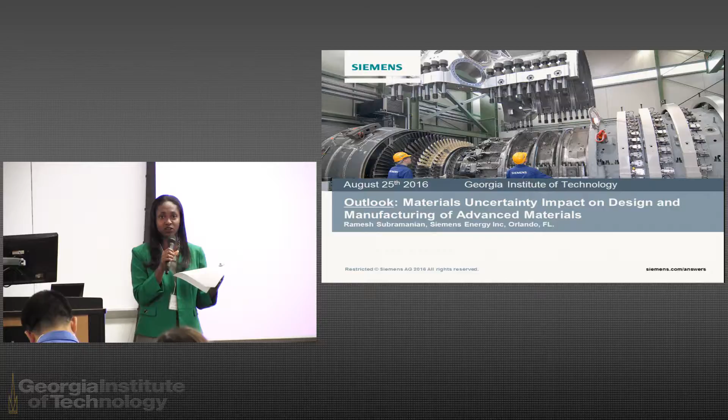He's the principal expert at Siemens Energy, and he's led research and development of advanced thermal barrier coatings for gas turbines for the last 15 years. He's currently lead design for additive manufacturing and crowdsourcing approaches to innovation. He's responsible for identifying emerging materials and manufacturing techniques for implementation in power generation product lines, and has over 65 patents to date, and has been awarded Siemens Top Innovator since 2007.

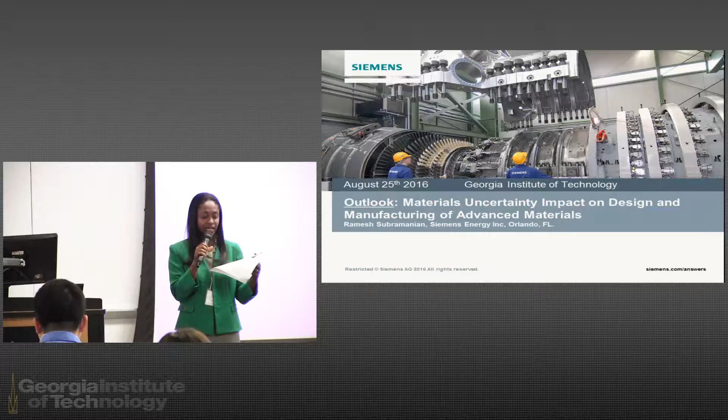So we're going to hear about looking at uncertainty, the impact of uncertainty. We talked about this earlier in the earlier talk on design and manufacturing for advanced materials.

So, hello, good morning, everyone. That was an excellent talk. Kind of got us plugged into the future, and hopefully I can get a push button which says change designer mindset. I would like that, so that I can change it in at least 3 months, so that I can make better products in the future.

So I wanted to just share what we are thinking in terms of as a large industrial conglomerate globally, where we want to utilize advanced materials and manufacturing. And of course, materials uncertainty is one of the key things that keeps us from utilizing the full potential of new materials and manufacturing technologies.

So my purpose today is, after having spent several years in developing coatings for gas turbines, which are really important for the efficiency of engines, I still have a lot of lessons learned on how designers still have significant reservations on how to utilize it fully. So the mindset of the guys who make the products is also an important barrier that we need to recognize. And I wish I could tell them, here's your informatics information highway, just plug in your data there or your mind in there, and it's not going to happen that way.

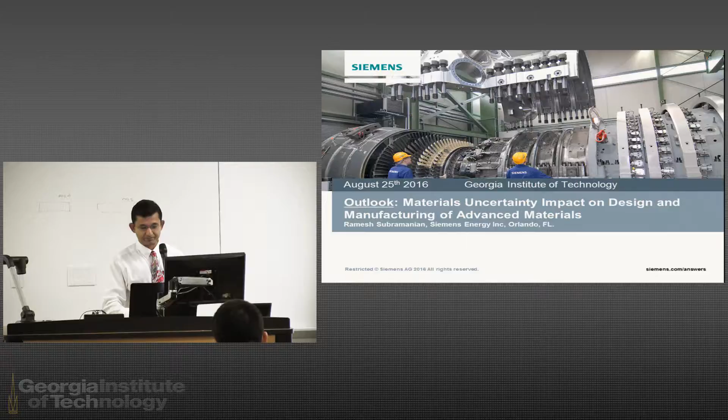So just to give you a quick overview, first give you a sense, if most of you don't have an idea of what Siemens does, of what the power and gas division does in Siemens. That's where I'm from. Siemens is so large, you can be from Siemens and not know what the other hand or the other brain of Siemens is doing.

I will talk a little bit about advanced materials and manufacturing and how that influences our generation of energy using fossil fuel. And then later on take the example of an emerging technology such as additive manufacturing to highlight the challenges that Bryce and Kevin have already talked about. How do we really bring together process, properties, and performance, and of course deal with uncertainties.

The field of additive manufacturing is moving very fast. Will the product implementation of additive manufacturing move just as fast? I don't know. That's part of the challenge, and that's where I'll end, basically with the outlook of how high-performance computing and its accessibility to data and analysis can help us utilize it very well.

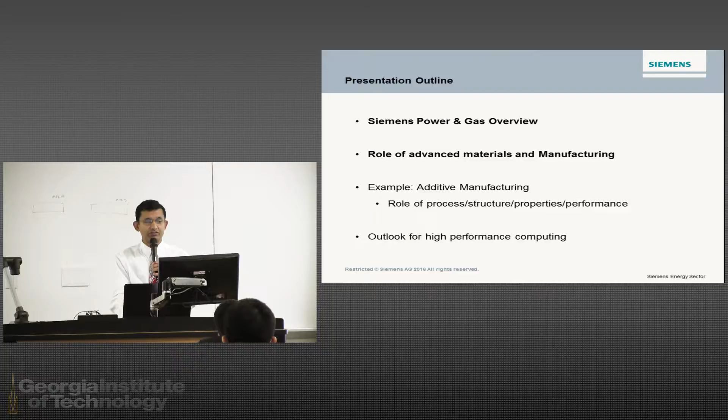So just to spend a little bit of time to share what Siemens Power and Gas does. It's a global company, $80 billion going towards $100 billion, and spread globally. And in the US, of course, we have a $20 billion business and more than 70,000 people. And I'm basically in the power and gas division and located in Florida, qualifying for the southeast hub as well, from a geographical point of view at least.

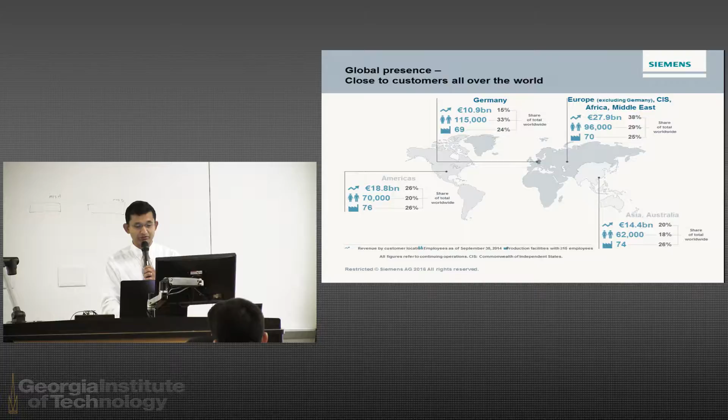And we address the global needs of energy, mobility, digital factory, healthcare, and financial services. And we are basically located in the power and gas division, where we are involved in power generation and services. And we have a corporate group which addresses all of these drivers that we need from a customer point of view.

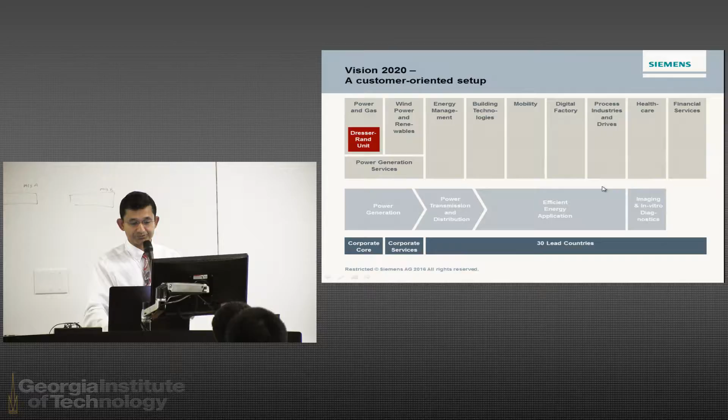So just to give you an idea, from the point of generating energy from oil and gas and driving it through the different central power generation systems which are currently in place, that's what we are familiar with, and going towards distributed generation with solar and wind, and transmitting the energy, and then bringing it to the industry and the private consumption. So Siemens basically is involved in all of these different sections of energy generation, storage, and deployment.

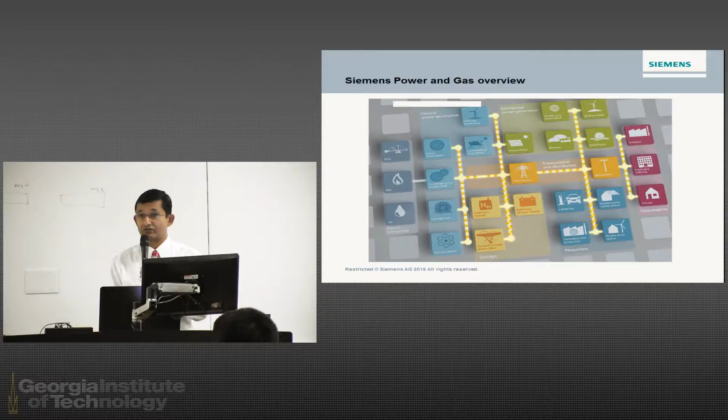So coming closer to the business that we are involved in, which is in gas turbines, recently with the acquisition of the industrial turbine of Rolls-Royce, or the aeroderivative gas turbines, we have a range of products starting from 5 megawatts up to 400 megawatts of energy that we supply in our industrial gas turbines.

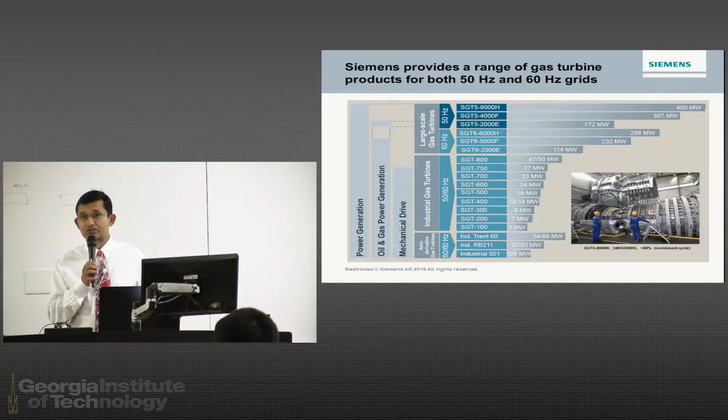And the challenges, of course, are as you cross this range of power across the different engines, the efficiency targets have been continuously increasing. So at some point, these engines, which were now nearly 20 or 30 years old, were in the 30% to 40% efficient engines, and now we are basically in the range of 60 to 65% efficient engines, and the theoretical limit is 70%.

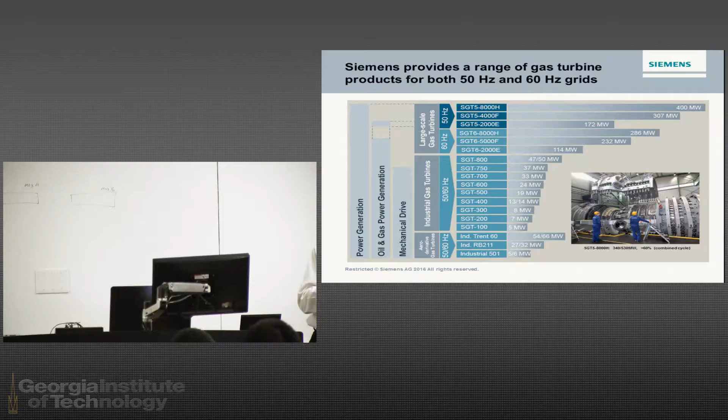So we're coming very close to the point where the efficiency of the engines, especially for fossil fuel generated engines, are getting very high. And therefore, we are pushing the limits of the engines and also pushing the limits, as I'll explain later, in terms of how materials and manufacturing can give you that extra piece towards the end.

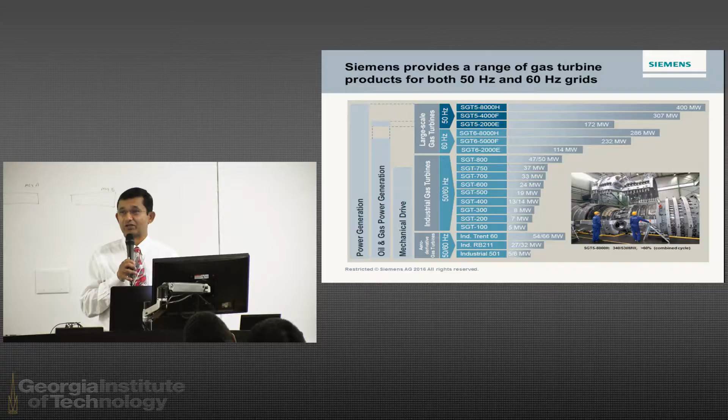Because the turbo machinery aspect of it, from the aerodynamics, from the heat transfer, and the structural integrity, the way you make the parts, which have been one of the major drivers of how efficiencies of engines have been increasing, they're almost tapped out. My colleagues in turbo machinery would not believe it, but because I have a materials and manufacturing background and a bias, I think there's a huge potential there. And I'll explain that with a little bit of data that I can share.

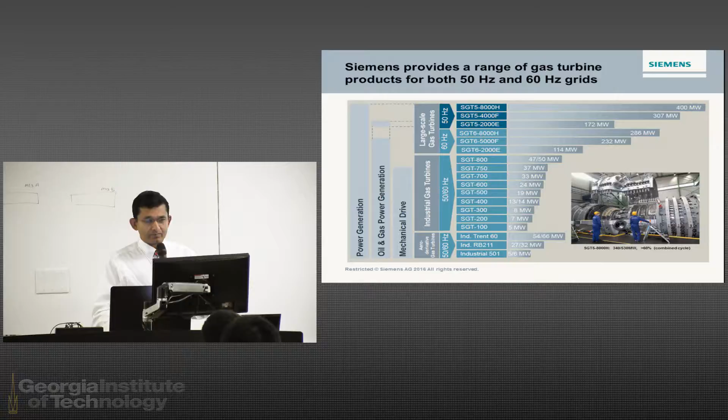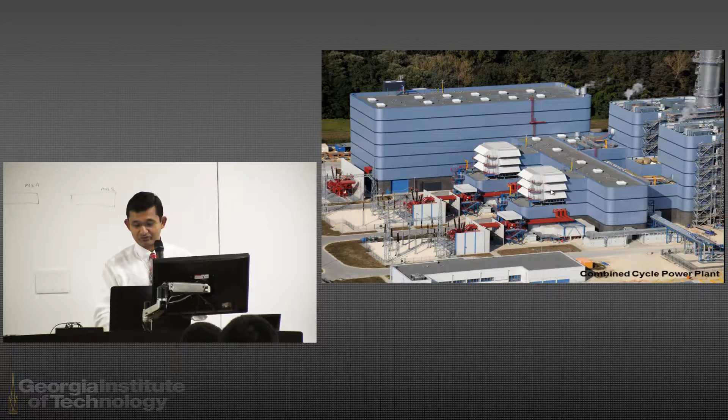So just to give you a reality, going from the size aspect, this is a typical power plant, which you will probably never see in the middle of the city. It's really far away. And that's good because of the emissions that it has, and we try to continue to reduce that as well. But just to give you a sense of the scale of the buildings that house the gas turbines, and then the scale of the engine itself in terms of how much material and engineering goes into making these engines.

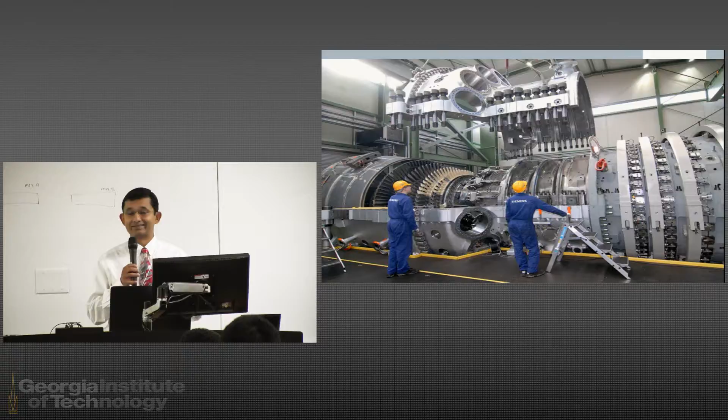to generate the energy. And here's where the challenges of high temperature, or really the harsh environments for materials, are the key driver for increasing engine efficiency. So just to give you a cutaway, to highlight some of the areas: the combustion section, which basically starts your flame, is carried down, and then it expands into the turbine section.

And there are many areas where the key words are, of course, combustors and transitions. The flame which carries through into the turbine section is called the transition, where the key focuses are basically to increase part life and lower emissions. And in the blades and the vanes, which basically direct the flow, and they turn to make the rotor move, that's basically the key area where the materials and manufacturing aspects come into picture.

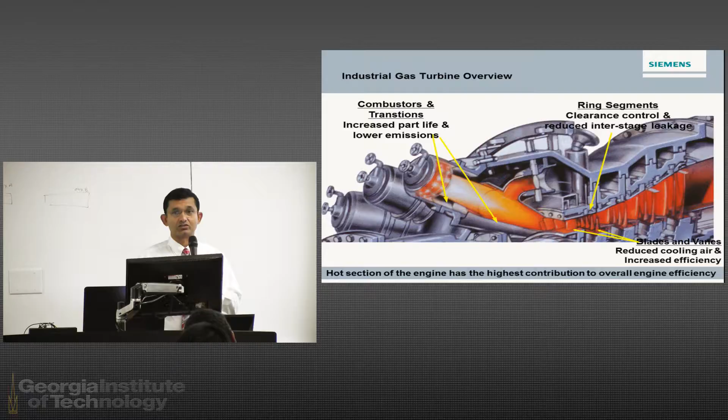And this is where the challenge of reducing the cooling air as the temperature of the flame continues to increase becomes very important. And that is a key driver where materials can make a difference. And of course, the leakages happening between the stages: the tighter you can make your blade rotate without leakages between stages are the key drivers for increasing efficiency. The more the leakages, no matter how good the materials are, the leakages will kill your efficiency of the engine. So this turbine section has the highest contribution to the overall engine efficiency.

So how do materials and manufacturing play a role here? We constantly increase the efficiencies of these engines by playing with materials, changing cooling air, cooling flows, designs. And recently we had a significant amount of brainstorming to say, how do we drive this to our next level, even maybe go beyond 65%.

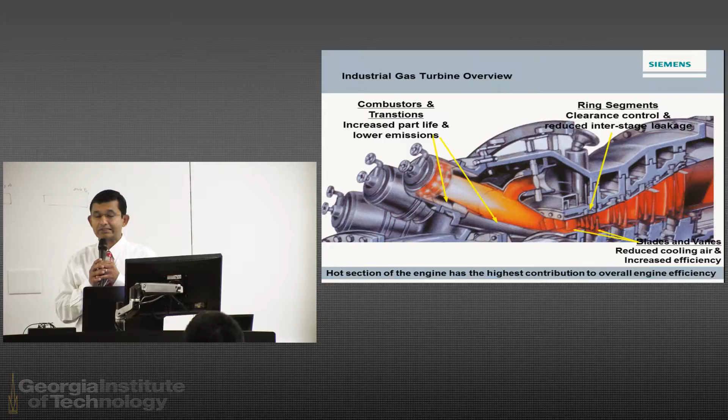And we did a Pareto chart of what are all the drivers of technologies that can actually make this extra step in technology. And I kind of wanted to, for my own curiosity, try to lump all of the materials-related topics in the hot section and even some in the compressor section. And I kind of laid out how does it stack up. And I was very surprised by the result.

Nearly 1/3 of the combined cycle efficiency improvement, more than 1/3, comes from advances in materials and manufacturing. There are many turbine-related, the traditional turbomachinery-related activities like turbine aerodynamics, compressor aerodynamics, mass flow, flame temperature, leakages, advances in rotor, how do you exhaust the flow. There's a lot of technical knowledge that goes in there to make the gas turbine.

But it was very surprising to note that the materials and manufacturing advances have the biggest impact on the gas turbine in terms of making it more efficient and also low emissions. And many turbomachinery guys, the designers, are now beginning to realize this, and therefore this mindset change is slowly creeping in that now we really need to make sure that we push the materials to its limit, which means they don't put design margins, which is what they used to do.

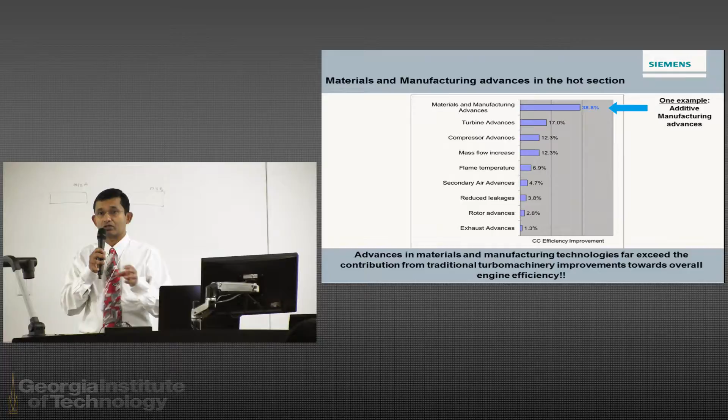A materials expert, a mechanical engineering expert, and a design expert, they're all very specialized for a reason. But the specialization leads to these individual silos where we don't optimize for design and materials across these multidisciplines. Therefore, this kind of a community where we are actually taking this multidisciplinary approach and mixing it up is very critical, not only in the area of materials, but how can we drive this into design?

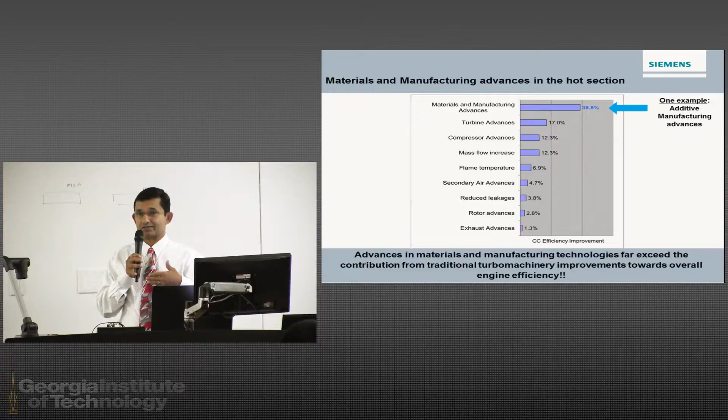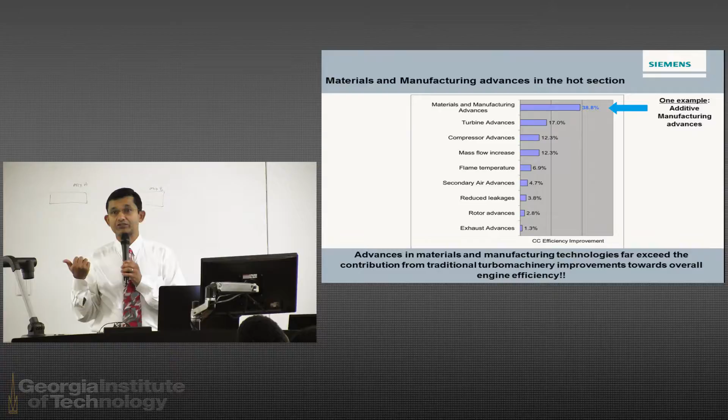And that is basically where I will drive towards the outlook, taking the example of additive manufacturing, an excellent example where it flips the model of, I'm going to throw this design over the wall and let the manufacturing guy work on it. Or I'm going to throw the design requirement over the wall and let the materials guy develop these new materials, maybe using some of the fundamental knowledge that the materials guys have. So we have to change that model, which is very important if you really want to use the full potential of what materials and manufacturing can bring to our product line.

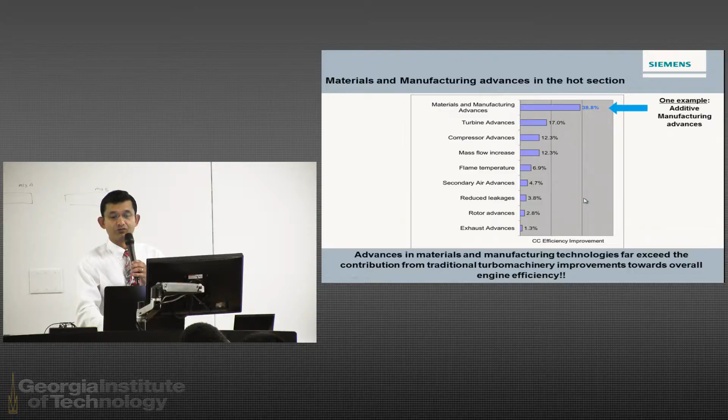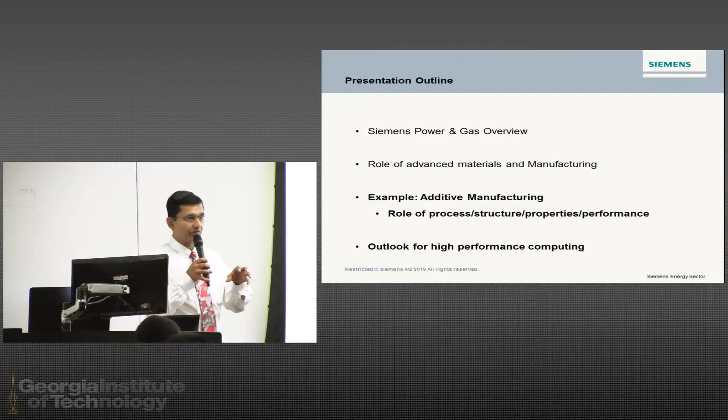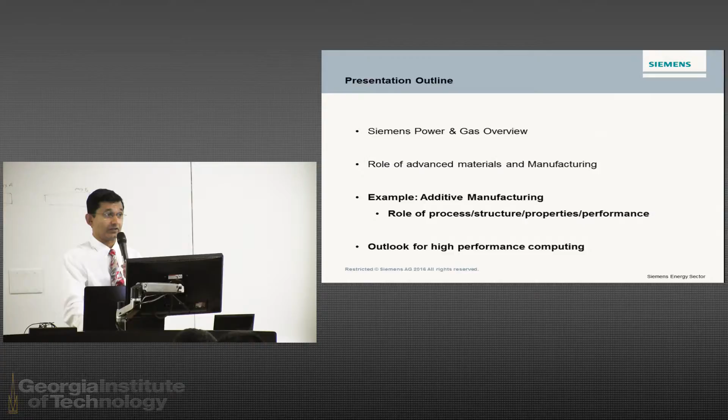So therefore, in the next set of slides, I'll focus on using this example of additive manufacturing and highlighting how this example brings this need that we are talking about in this big data hub, how the high computational aspects as well as the informatics can accelerate the development of materials and bringing it into the product line. You'll be pretty surprised how long it takes to bring advanced materials into a gas turbine. Ours don't fly, but the flying ones take longer as well.

So let me start with the basic information about additive manufacturing. Most of you may already know this, but just to give you a feeling of the advances and where we are going with regards to integrating design, materials, and manufacturing. So additive manufacturing, there are plastics, ceramics, and metals. And for metal, starting off with the powder, which is atomized, you take the CAD model, in this particular case a burner nozzle all the way in the combustion chamber that I showed you in the earlier slides.

You take a STEP file, triangulate it, get an STL file, and start scanning them in multiple layers, and you build your support structure, or you orient the part in the bed in a direction which makes it easy to build it by layer. And then this particular CAM file, you download it into the machine, and the laser scans across the powder bed, and then the powder is traversed across each layer, and the part drops, and you make the part.

So you build it layer by layer, and therefore you can make many unique features that you cannot make any other way, because you can actually combine many materials together. You don't have to join them, and there can be complex shapes because you're slicing it and building it. And then, of course, you get the finished burner head, which is a design feature that may not have been accessible previously.

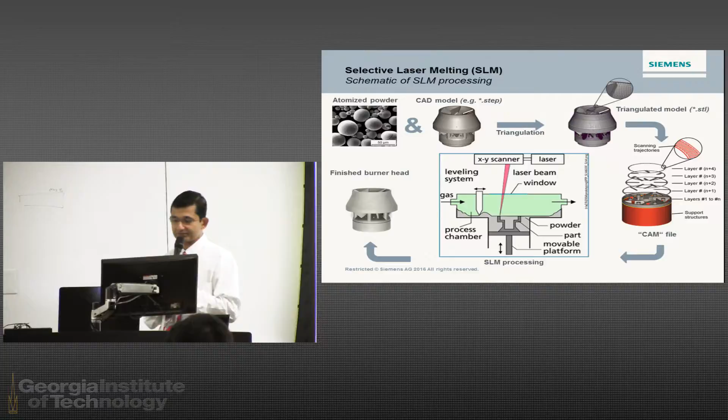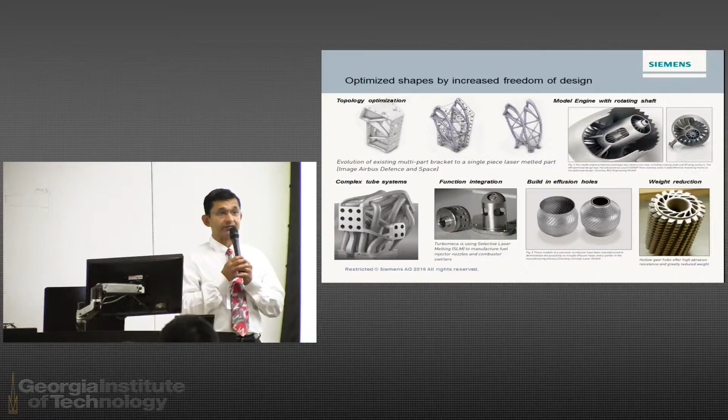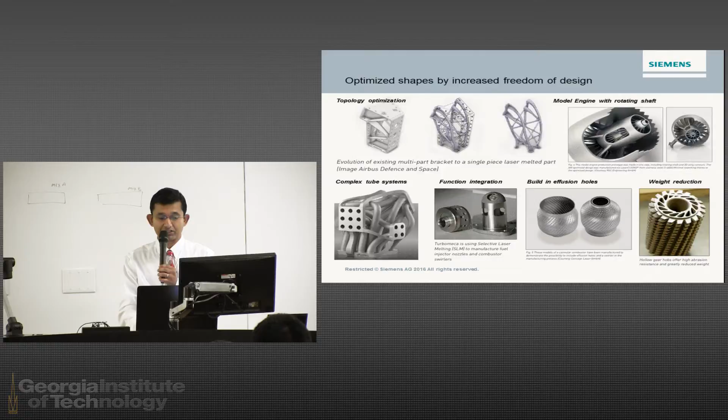So the question is, these design features all assume constant material properties. The topology optimization, which is typically done by the designers and the CAD software that are there, all assume that the material properties are the same. And that is one of the key things that needs to change from a mindset. So for example, I just zoomed into one of them where, the way you start scanning this in the bed that I showed you before, the microstructure on this ligament is going to be different from the microstructure in that ligament, which means the properties are going to be different.

Are we able to get test coupons for every geometry and every ligament in every direction before you design this? Absolutely not. So what do we do in terms of defining? It is not a weight reduction. So for example, if I now push this component in fatigue, I don't know which ligament is going to fail. So I don't know if this is actually a functional product at all or not.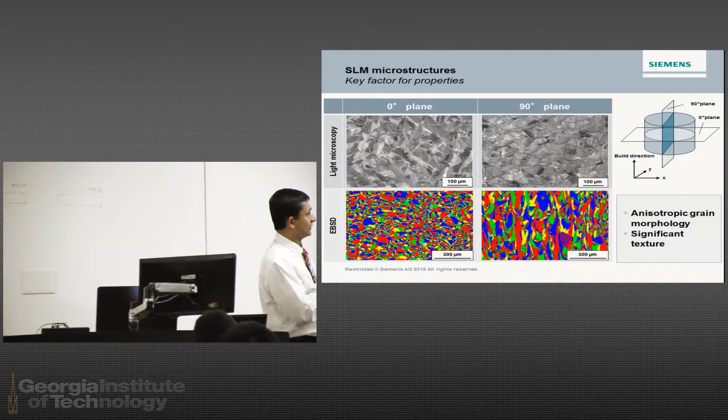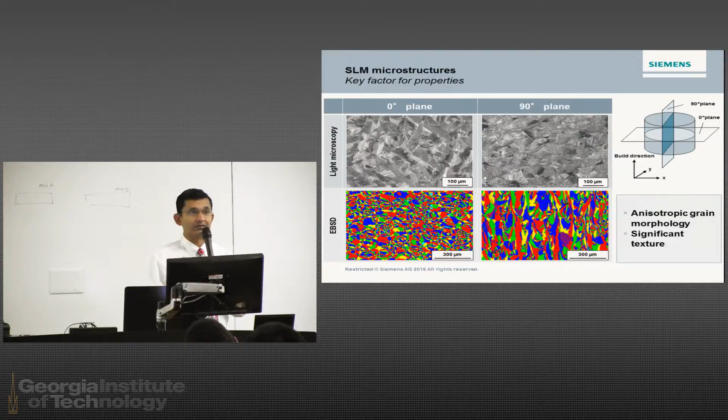So just to get into the details of what a typical material science guy would see in any of these microstructures, in a simple plane flat buildup of an SLM part, there's a significant amount of microstructure variability. Across the plane, you'll have basically an equiaxed structure, but built across the 90-degree, which is along the vertical, there is a completely different microstructure. So the anisotropy of the material, depending upon the angle at which you build up, is significant.

So if you go back to this particular picture, what is the angle in which you're building the part up, and where is the microstructure? We don't know that, and we cannot spend enough time making all those coupons either. So I would never be able to push a design to make new designs without guessing the properties. So how do I guess this with reliability? How am I going to put a handle on the uncertainty, or how am I going to change the designer's mindset to take a risk?

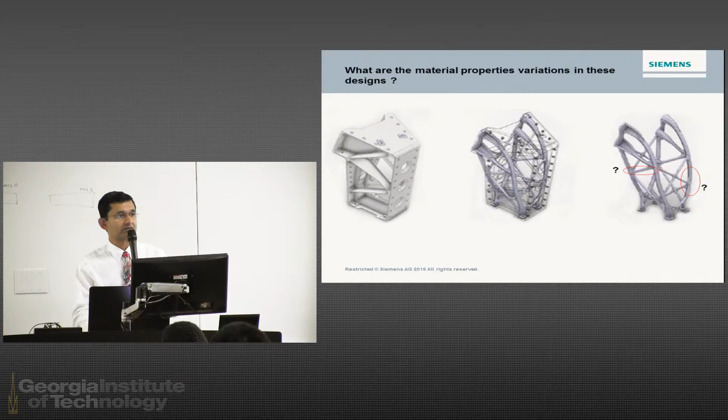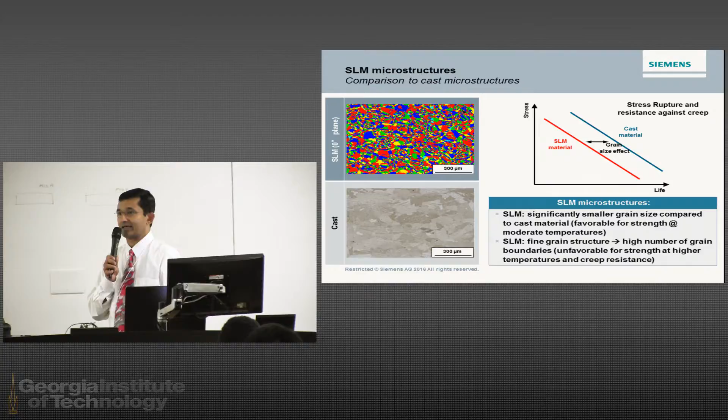So this is basically my main challenge from a company which realizes that advanced materials and manufacturing is important and additive manufacturing is a key enabler. How do I go forward with that? One of the key things is, of course, utilizing what we already know. We know we can cast parts, and we know the properties of cast material, and we can make debits. This is where we can take the existing knowledge and apply certain debits to what we already know. And this is one way of doing it, but then how do we apply data analytics so that we can reliably take debits from existing knowledge for new manufacturing processes?

If we wait for all the new manufacturing processes to become reliable and visible for the designer, you're very late from a time to market point of view. So this is very critical regarding the discussions, the presentations that we had in the first two presentations, that we need to address uncertainty. It becomes more important in new manufacturing technologies with higher pressures from the market to bring

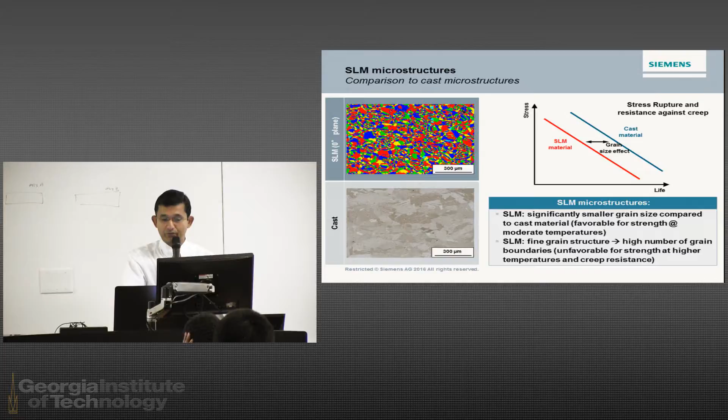product very quickly. So if you take the traditional approach, and many of you have seen this, if you start from the process, the structure, and performance, and you get to the product design, what we do typically is on the bottom, where we take a design, take a requirement, define the material function needs, develop a new process or a microstructure, develop the materials data for design. You manufacture and industrialize what you did on the coupons. Now you need to make it for parts and for higher volume.

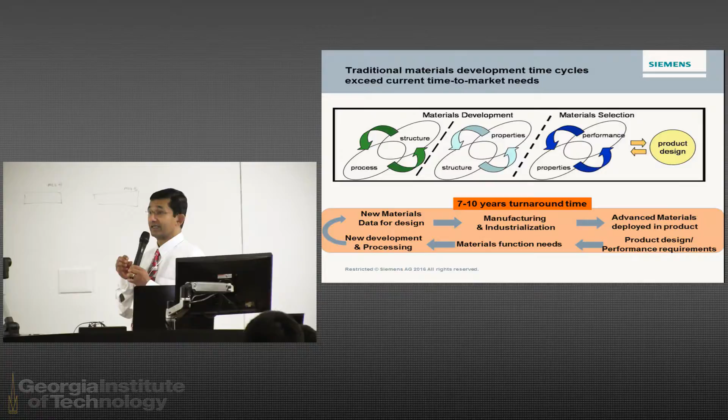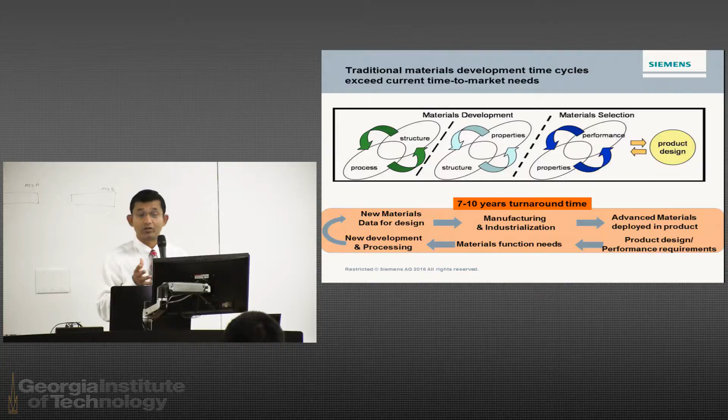And that is about getting your specifications. What are your qualification and certification approaches to define the product that you want to make in many different vendors, and as well as in a higher volume, so that you can make more of the final product. And of course, that finally leads to a mature manufacturing process, that then finally leads to the deployment of the advanced material into the product. So that's nearly a 7 to 10 year turnaround for a full realization from a very low TRL number up to TRL 8 or 9.

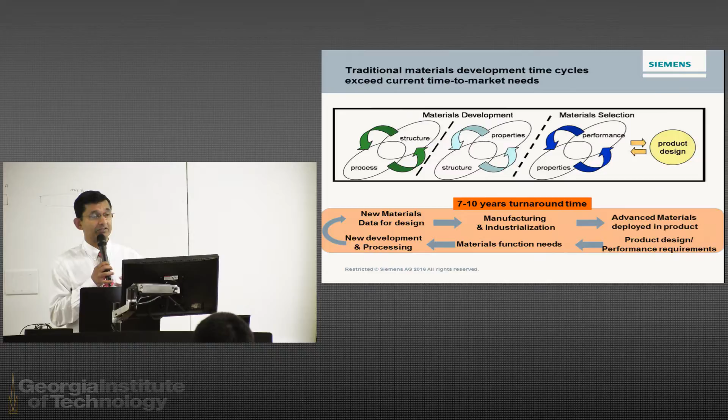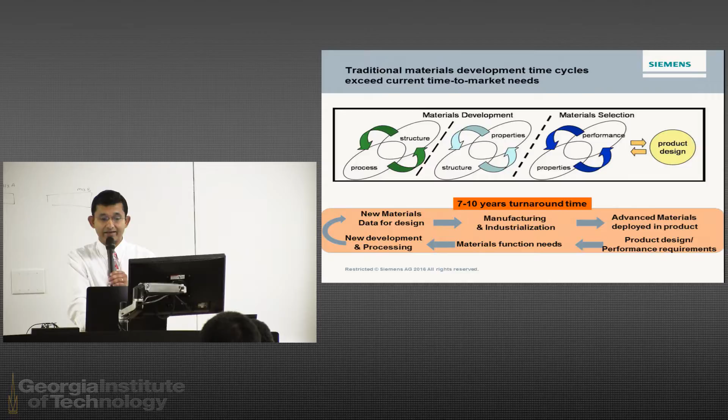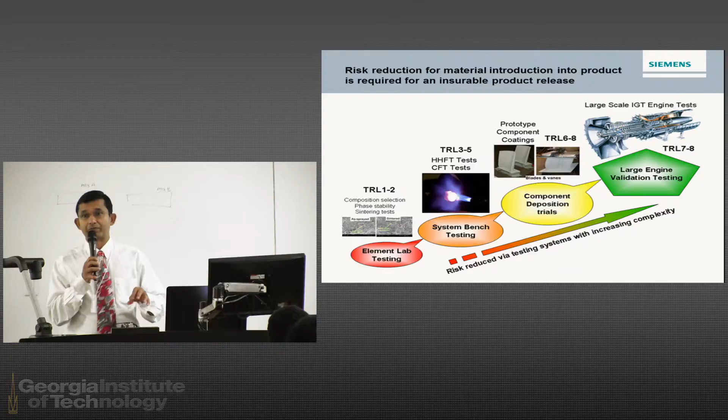And basically, we have to break this paradigm, otherwise we are not going to fully utilize additive manufacturing in the time where it can have its benefit. And when we talk about development, there is also a risk reduction because every component that we make or every engine that we sell has to be insurable. The insurance company has a significant amount of impact on our utility companies before they purchase an engine. And insurability comes from how much new risk you are introducing into the product. So we have to go through steps where we do the element lab testing to system testing, component and large engine testing, so that we can sell a product which has a lower risk.

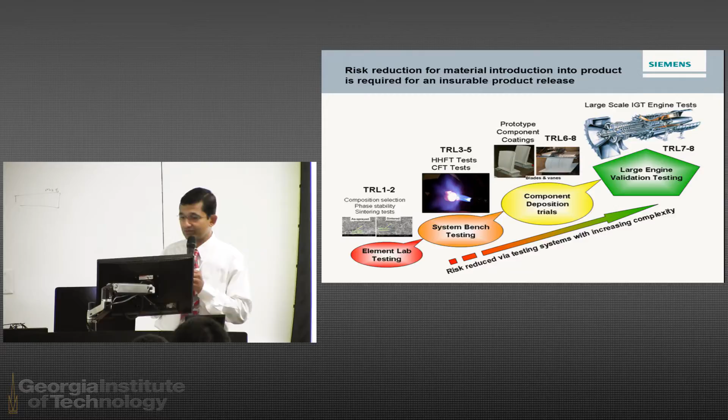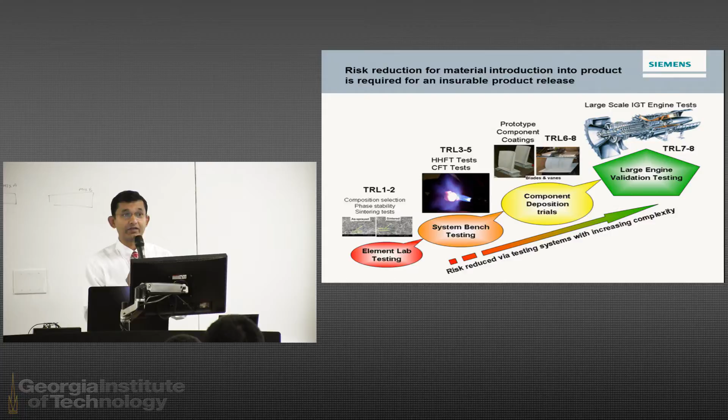And essentially this has to happen in parallel in addition to the uncertainty that is introduced in new manufacturing technologies. You cannot do it in sequence. So what is the innovation that we need to address this in parallel? And that is the key challenge that we have to utilize the capability of new manufacturing technologies in our industry, in this specific problem scope that we have from Siemens.

So I'll leave this with an outlook. I'll leave the last slide here and then talk a little bit about where, and this will be a topic for discussion during the workshop here as well, we really need to approach it from an integrated model-based material development. Many of the discussions have already mentioned it, and of course, the MGI initiatives and the ICME initiatives have really accelerated the visibility of such a need. And many of the elements are already in place, but we now have to ask ourselves, how do we drive it into an industry and as well as into the designer mindset and bring visibility so that we can execute

on these developments. So let me highlight a few keywords, each of which is a separate talk by itself, and there's a lot of technical details available in the literature, and it's not the intent to go into those details in this presentation, but to give you a sense of how we want to address it. So starting from when you're making the product in the manufacturing process, the process monitoring: especially in additive manufacturing, you can monitor the process very regularly at a very detailed level. You can get a lot of data from these machines, which we typically have not done for other mature manufacturing processes. So there's a significant amount of data that can monitor in real time how the manufactured part is being made.

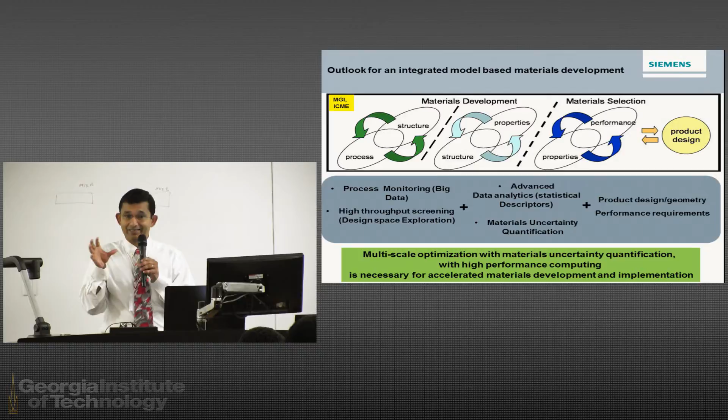So to bring in the design space and visibility of the design space to the designer early on in the design stages, and enable a screening process from a design point of view. If you can do the heat transfer and structural integrity to know which parts are going to survive in the final product, if you can integrate the tools early on, then this will be very valuable. But it is not an easy topic. It requires a significant understanding of the workflow, starting from designing to qualification and validation.

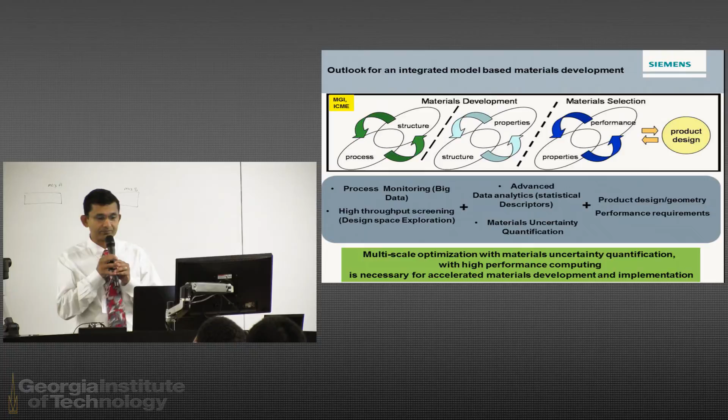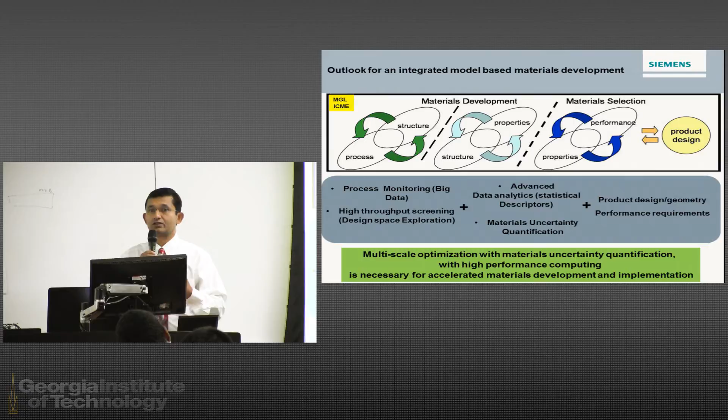Next step is basically understanding the heart of a material scientist, which is, let's take a microstructure and see how the microstructure relates to the properties. If we always have to take very simple correlations and address it by polishing the sample or by sectioning the sample, you're going to spend a lot of time trying to understand how these 2D images contribute to a 3D property. So we have to look at a huge amount of data that's available so that we can use new statistical descriptors that enable us to correlate properties to the varied structures.

And also from a probabilistic point of view, you need to know how the structures vary so that we build the uncertainty in it. So making our microstructure to property relationships in a mathematical way is very essential if we want to bring the optimization into the design cycle. So materials uncertainty quantification becomes very important, because when you start doing the statistical descriptors, you will understand how to not be deterministic and give a specific design curve, but actually give them a probability distribution. And this becomes very important when it feeds into the design and geometry and the performance requirements, where you'll know that your design is going to have a probability of success, a probability that you will meet the target. And therefore, you can build in the risk upfront.

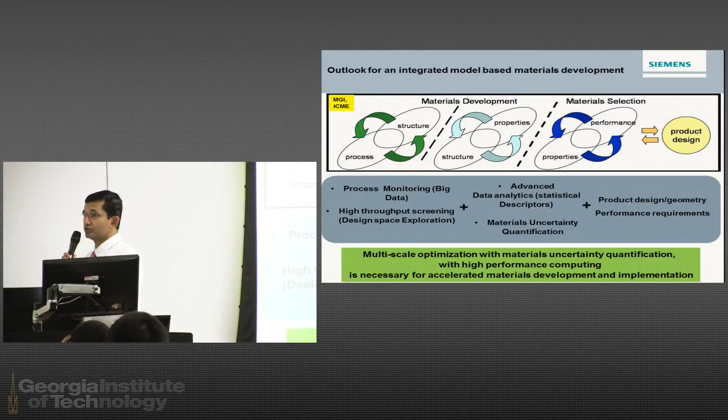So to be able to bring process, structure, properties, and performance optimization, this multi-scale optimization, the foundations of these have been laid in MGI and ICME, but we have to bring it more real to component design, at least in the industry that we are working on. And I believe here is where we can really utilize the data hub that's coming up, and the high-performance computing to integrate this, because none of this is trivial in terms of integrating the materials informatics and driving it into the design change.

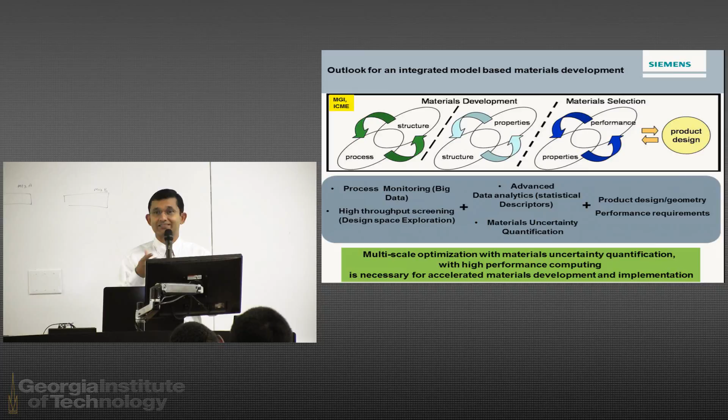I'll leave this slide and stop here, but essentially this is the way we would imagine, and is a challenge for us as to how we would accelerate materials development and implementation within our product line. Thank you.